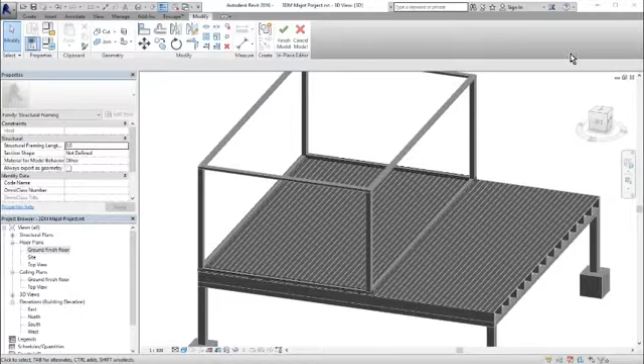Okay, now our roof is going to be sloping this way. And if we remember our reference drawing, it's going to be sloping like that. So from that, we know that our structure is going to be something similar to this setup.

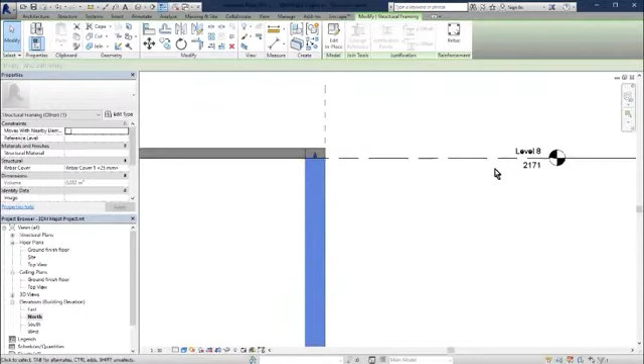So essentially, if we look at our north view here, we know that this side is going to be, one of these sides are going to be taller than the other. So we need to actually have another level here. So I'm going to call this level base of wall plate.

And we're going to have another level here, and let's call this level base of upper wall plate.

All right, this is our top view. We're not going to use that, so we're going to have that there. And just to be consistent, all our empty views, we want to have it there, and like that, so we don't get confused with the different views.

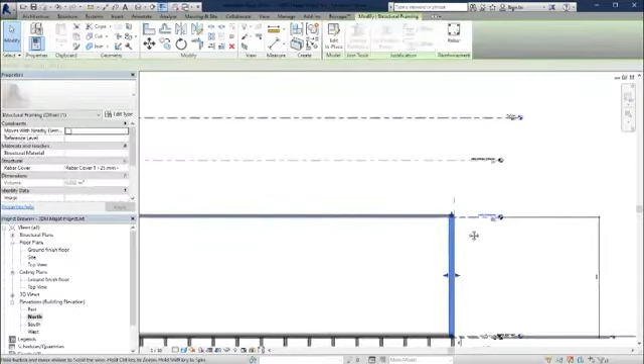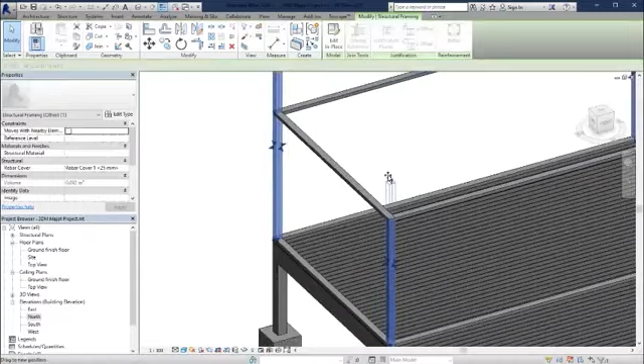So this side here actually needs to be this high, like that. And remember, we have two solids that's here, so we have to look at the 3D view, and we're going to make this one also taller, and we can use our align tool as a shortcut and choose that and say align to that, and we have that taller.

So we would probably, I'm going to leave this for now, but we would definitely need to have a member, a wall plate running on the top of this member here. So we are actually going to create a wall plate there.

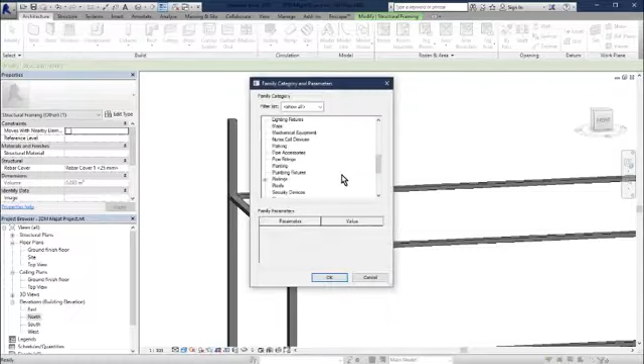I'm going to model in place, and it's a good time to save this project again. And we're going to choose structural framing. We're going to call this upper wall plate.

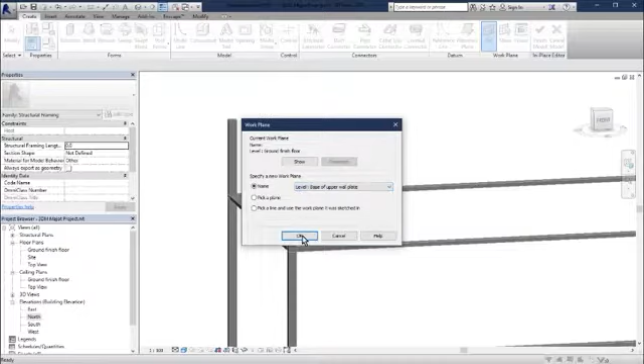And we are going to set our levels to the base of upper wall plate. There we go. And do an extrusion, so we'll have there we go. And this is going to be 50.

All right, great. So now we want to have rafters that goes here, and we definitely going to probably need a support in the middle, and a purlin, because this span is going to be pretty wide for timber. All right, and we definitely will have to double them up.

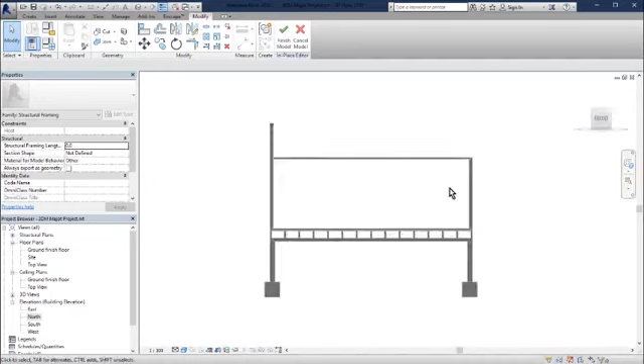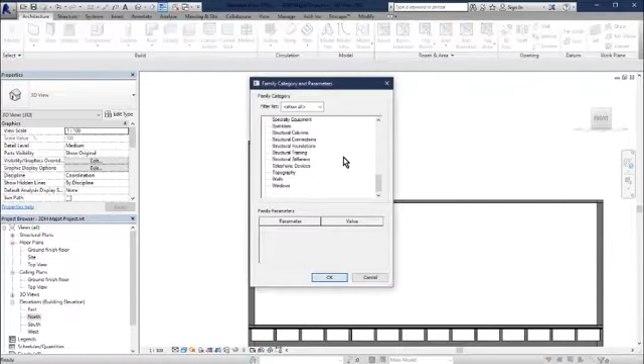All right, so if we look at our front view, so we should be looking to do some joists like this. Now to do our joists, what we can actually do this from the front view, and we can do that by choose OK, and we're going to create another model in place, and it's also going to be a structural framing, and we're going to call the roof joist.

And so we're going to have these members like that. So first thing we need to do is to set our work plane to front. So now our work plane is in front, so now we can actually draw an extrusion.

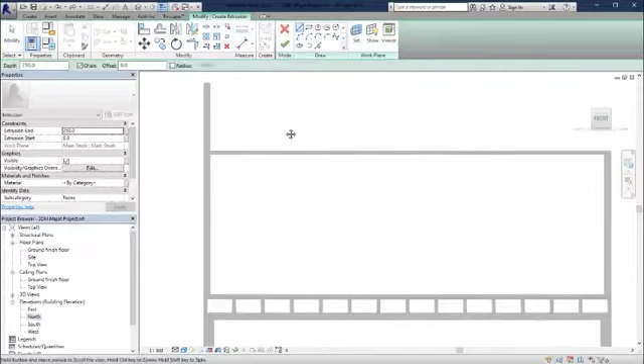We're going to draw, first to do this, what we're going to do is draw a reference line first. So let's use, so we're gonna...

And let's actually use between, we're going to do that again and use here and here.

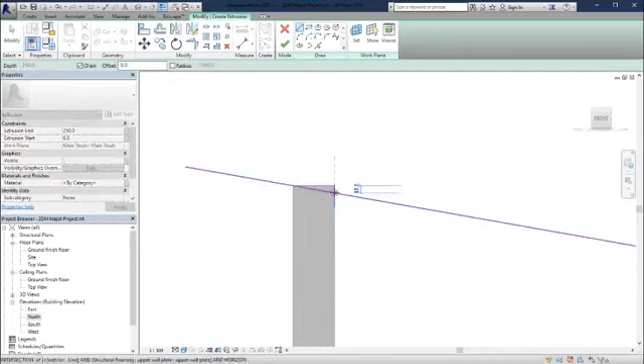And what we're actually going to do is extend this down a little and extend this up a little. And then we're going to cut around this, right? So this is actually going to cut out of this.

And we're going to use a break tool to break that point there and use our trim tool. Trim this there and trim that there. Trim that to there. So now this kind of does that, right?

And we're doing the same thing here. Actually, this needs to be angled a little bit more. So actually, let's fix that up.

Let's do that again. That would need to go from here to here. There we go. And this would be extended downwards like that. And this would be extended like that.

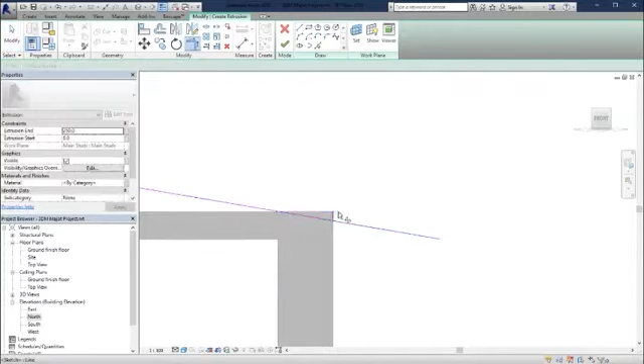So now if we trim this properly, so we do like that and trim there and trim that there, and coming down this way now. Do that and trim. Let's break this first. Let's break that line and trim to there, to there, and trim to there.

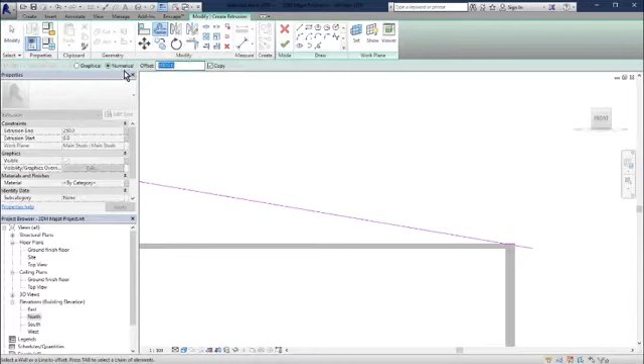There we go. And then the height of this would be 200, so we would offset this, and this is the offset tool. So we're gonna offset it 200 millimeters, which would be like that. And I'm gonna draw this like that and trim that to match there.

Now we're gonna do the same for here. And trim this to match there. So we can even extend this down a bit for our overhang. And choose. Okay.

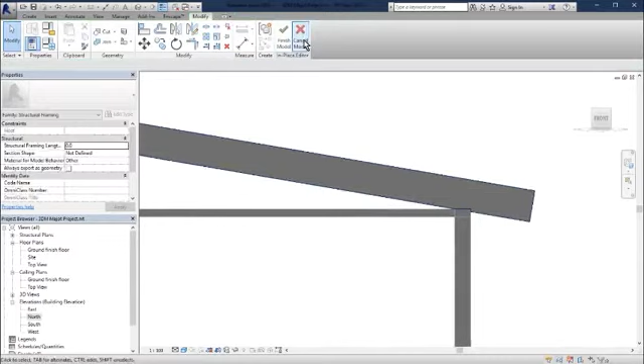Now in this design, we also need to have two members running here, and your structural design might vary. So what I'm going to do is go back to my wall plate here and copy.

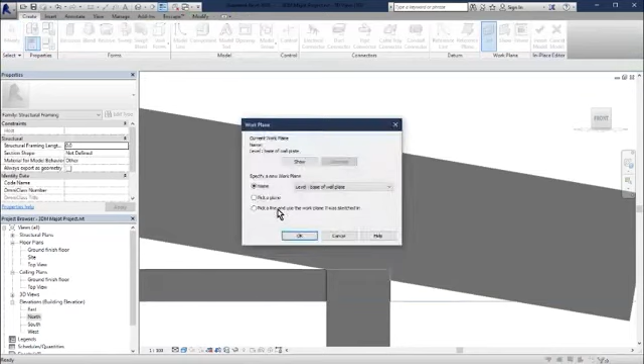First I'm going to change my work plane. Let's set our work plane to the surface here, and then rotate that 90 degrees. Let's switch to wireframe so we can see this.

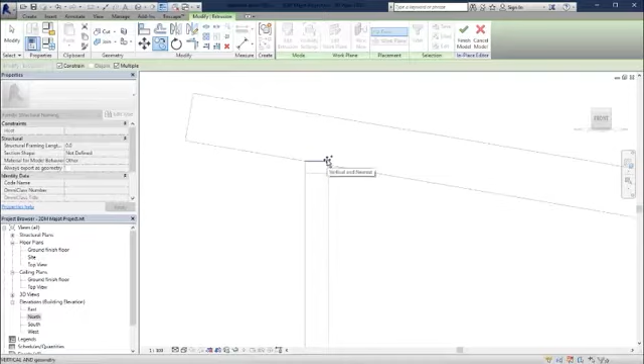I'm going to put that here, copy this again. Now we're going to copy that there, and copy this. Unconstrain that, and up here. There we go.

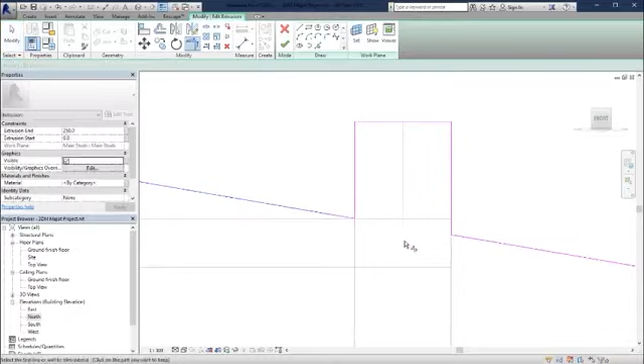Choose OK, and let's edit this now. We're going to want to edit this again, and we want to edit this path to now include that. So we're going to trim this up like that, and we're going to do the same here.

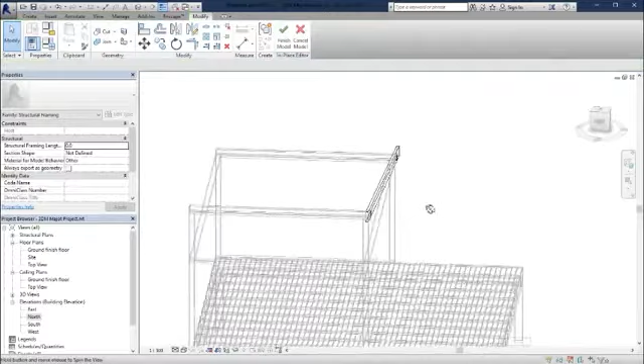I'm going to delete that. Choose OK. Alright, so if we look at that in 3D now, we get this. And we're going to make the thickness of this 50. So that's kind of what we get now. Let's shade it more.

And so we're going to extrude this a little more. Let's work with a 2 foot overhang. We can do it from a top view. Let's go from the top view here, and we can actually go out by 2 feet.

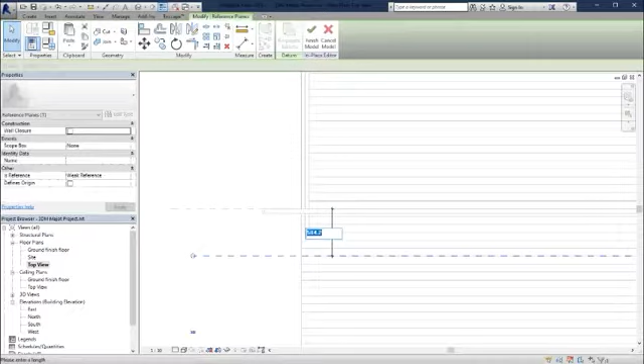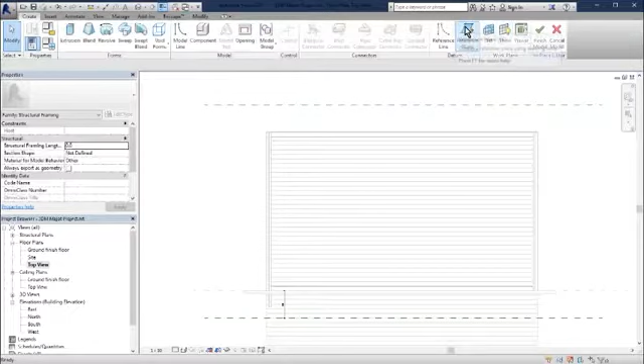So we can use a reference plane right there, and we can make this reference plane be 2 feet. And we're also going to back as well, so we want to make this 600. And while we're doing that, let's also make...

So these are all reference planes that we're doing here now, and let's make that 600. Alright, so that's basically our overhang. So we know that we want to align the edge of this to there, edge of this to—let's choose that one—align the edge to there.

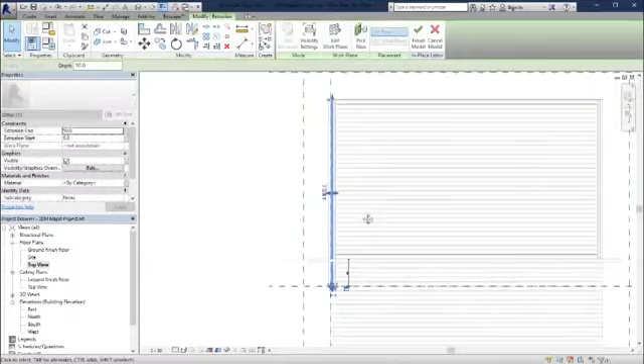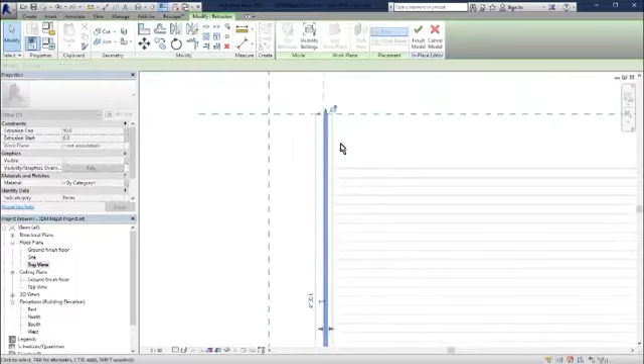We also need to grab that bottom one as well. Actually, no, we just need the top. Let's look at that in 3D. So there we go, it's not looking bad.

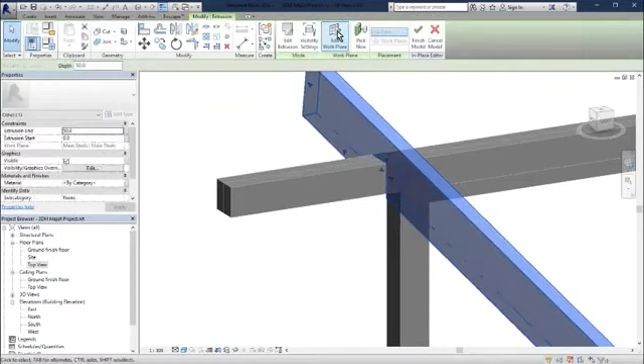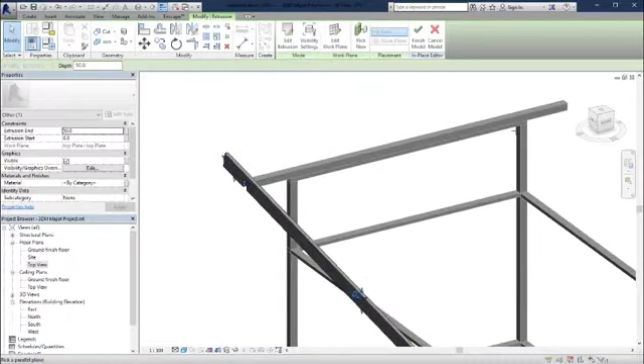Alright, and what we want to do is start this at the face here. So let's go into this and let's actually change the work plane to here.

Extrusion to negative 50. There you go. And now what we want to do is array this.

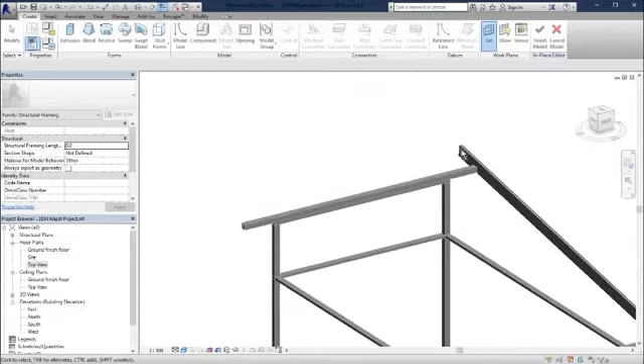And how we want to array it, let us set our work plane now to be the top view. So that's our work plane. And we want to use the array tool, and hopefully, choose the last one.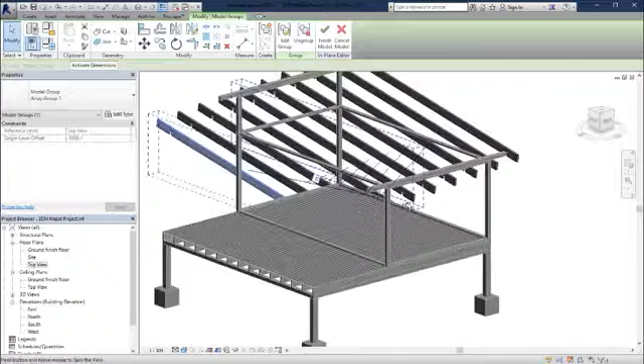So we want to choose the edge of somewhere and choose the last one somewhere, and say we want maybe 10 copies. Oops, seems to have made an error there, so you see that. So we want to change that.

Let's use our top view, it's probably a better view to use. Okay, that's our piece there. So let's go to array and let's choose that menu there. Let's set our top view. There we go.

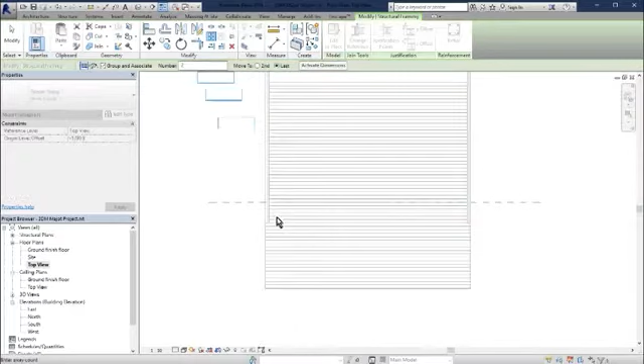And what we need to do is finish modeling first, and then we use the array tool to go from there to the last one here. And let's try 10 copies. Let's do that again.

So what we're going to do to copy this is we're going to choose OK to come out of edit in place mode. We're going to go to a top view and create a group, turning this into a group. So if we edit one, I will edit. We're going to call this rafter, and we're going to copy this.

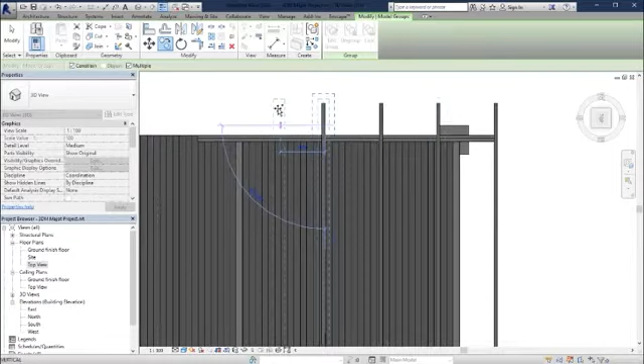And let's try 900. So here we go. I have multiple selected, so it's going to always copy at 900. And let's just make the last one up to this end here. So I'm going to use my align tool and align the edge here to that edge. Great.

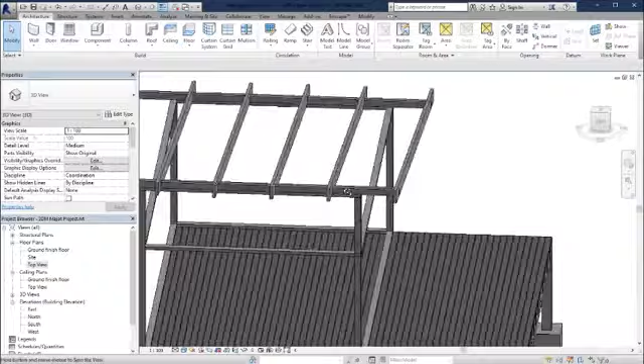Alright, so now we have our rafters. Now, for our purposes, we are going to need a purlin in the center to help with structure, because these spans are quite great. So we'll go here where our studs are, and we are going to copy this to the center.

So let's go to our top view, and let us create a reference plane, and let that reference plane be the center. So now we can... let's go to our 3D view.

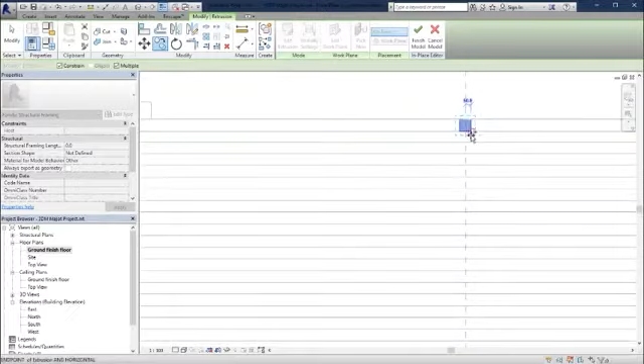So we can grab these, and that's where it was. Let's go to our front view actually and copy that. So we're going to copy that here, and we're going to also copy it here as well. So if we look in our 3D view, we should have something like that.

And what we're going to do is we need to have these reinforcements here and here as well. So we're going to choose OK, and we're going to copy these guys here.

So let's go to top view and copy. We're going to select here, copy one in the middle and copy one on this side. So we should end up with something like that.

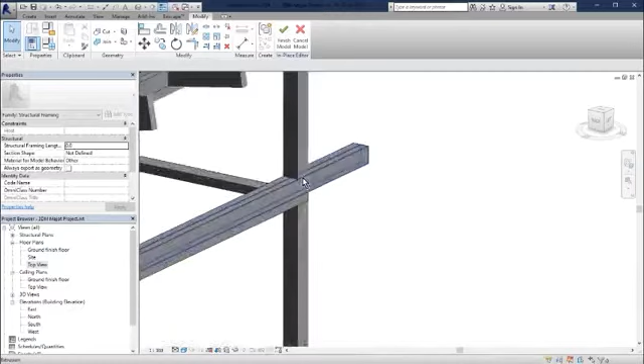What is actually happening here is that this will land inside that, and this will land inside. We're going to land this on the inside here, and on the inside bigger.

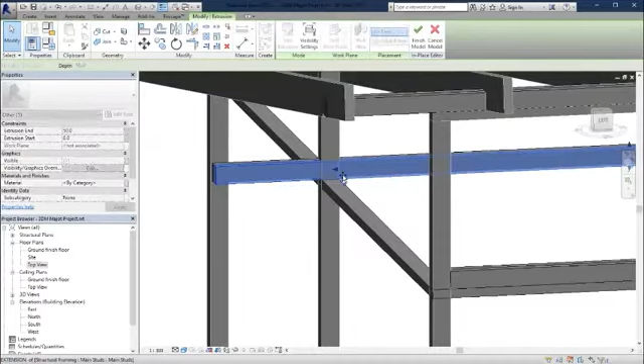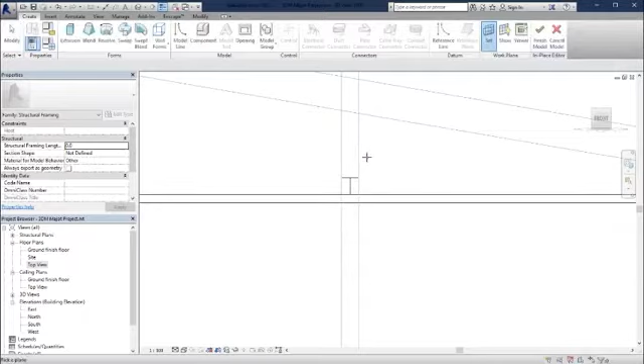So we have some purlins, so we can have some support for our structure. Let's go from a front view, and let's go to wireframe, and let us change our work plane to the front, so we can move these guys here now, from here to here.

Now we want to actually cut these out, but it's a good thing we made it a group, so we can go into this and modify the path of the extrusion for this. That, that, that. And it will, of course, change all of them to have that made there.

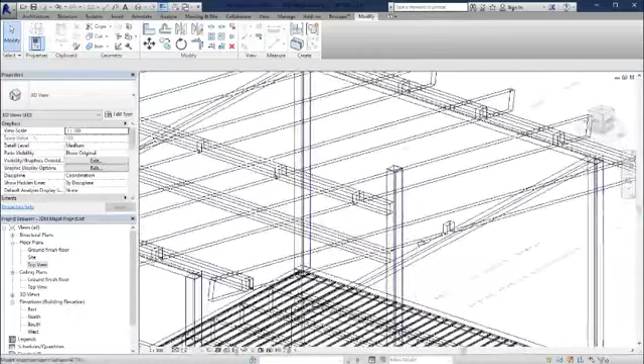So of course we now need to modify these studs, and these studs need to be down to here, and this one also needs to be down to here, which is okay.

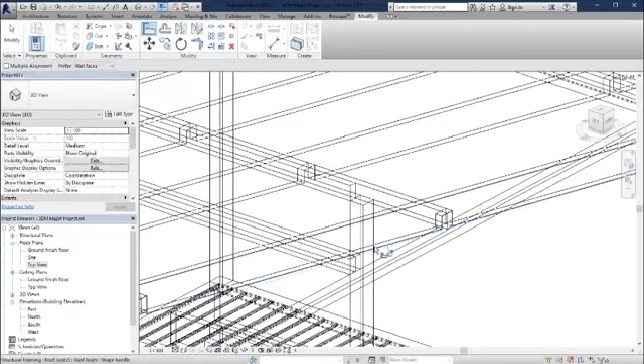And we're going to use align, so that we align these studs to there, and align these studs to there, and these studs to there, these studs to there. All right, and that will give us that support in the center.

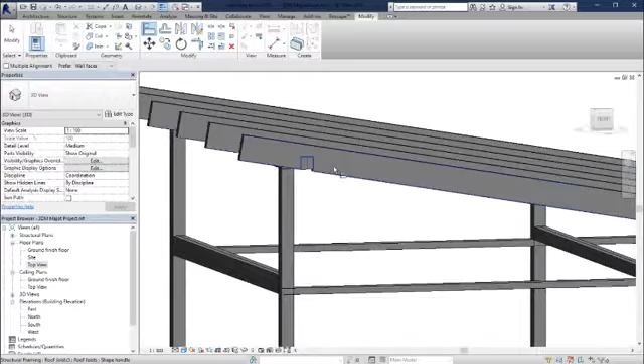Structurally, though, I think this can work. Sometimes there need to be supports at the corners, so you guys can choose if you want to put that on. Maybe this is a little too small in terms of maintaining the thickness, so maybe this should have had to go up a little bit more.

But pretty much at this point now, we can put in our secondary studs in the center and then mark out our doorway.

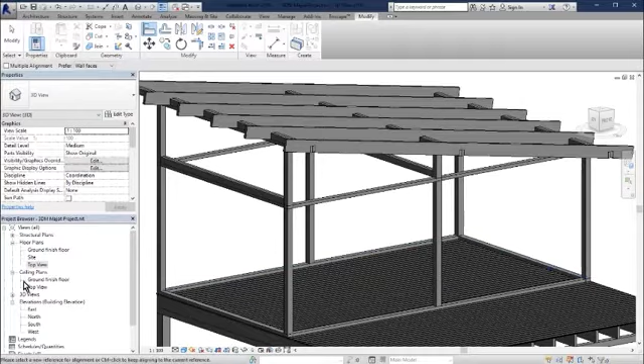So let's first now determine our openings. And to do our openings, we are going to use our front view, and we're also going to use more levels.

So I'm going to copy this one up, and we're going to call this top of door. And we're going to have a couple more levels: bottom of window, and another one we're going to call top of the window.

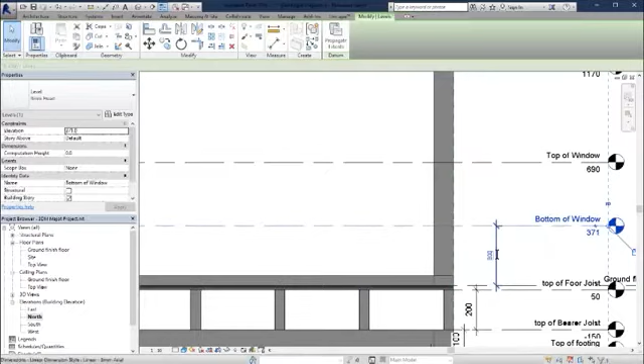So from the finished floor to the bottom of the window, you want to make about 300. Actually, if we look at the design, this was a bit taller. So this is probably going to be 3 feet, so maybe 4 feet, which is 1,200.

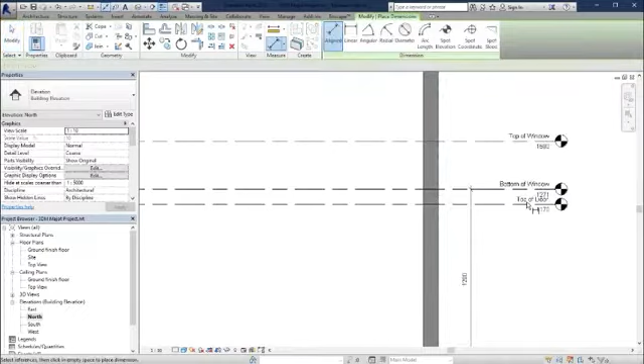So this would be our windows here. Let's make the window a little bit more sleek, so let's make it 600. There we go.

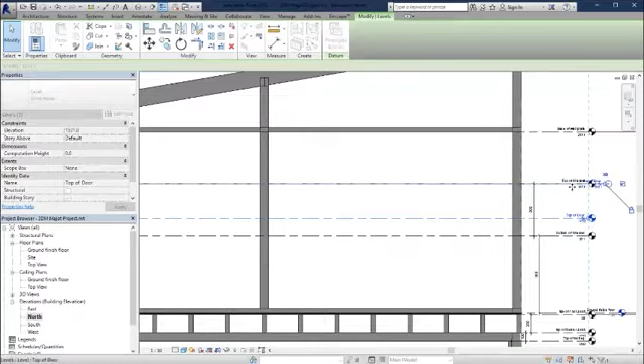Now our door will be the same height as our window actually. All right, so we could actually do away with this and call this top of window and door.

And we're going to use some reference planes now to determine where our door will be. So let's place our door here. We're going to want a 6 foot width.

Let's make that plus 200. Yeah, probably about that wide.

And then our window will start here and it will continue all the way to there. So that will be our window there.

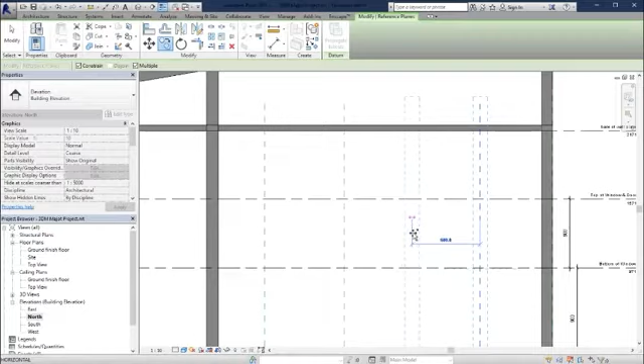This will be our door, which will be a double kind of door. So let's actually put in the middle part of our door, the 600 mark. There. All right, so door, window.

So the next thing we're going to do is frame out our door. And to do that, we're going to create a new edit-in-place mask. So we're going to go to component, go to model in place, and it's time to save again. And this time we're going to also go with structural framing.

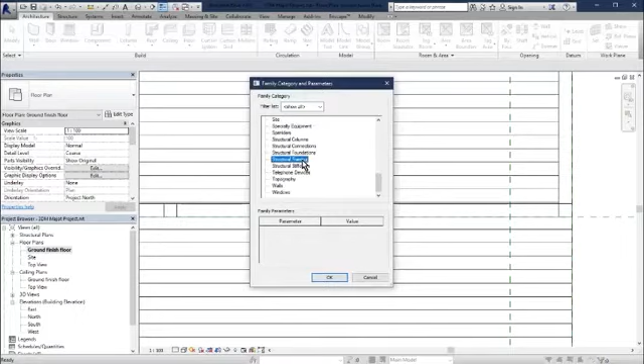All right, and we're going to call this openings. We're going to call this middle studs.

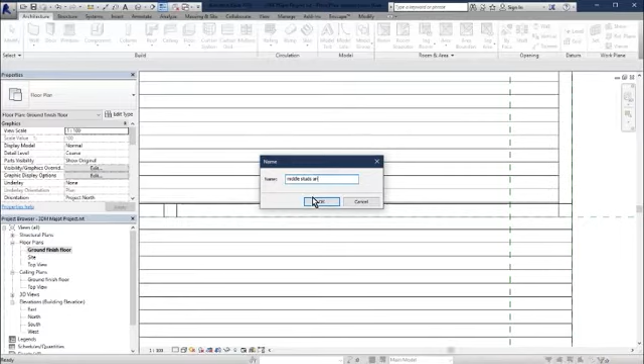And openings. We are going to create that, and that's going to be 100 by 50 millimeters. Okay, that's right. So we're going to have that there.

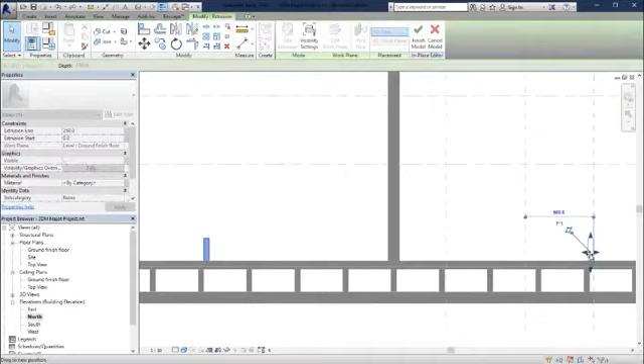And we're going to use our north view. Let us move that into place, up to that level there. Actually, it's up to this level here. So use move tool, then we'll use copy tool and copy that here.

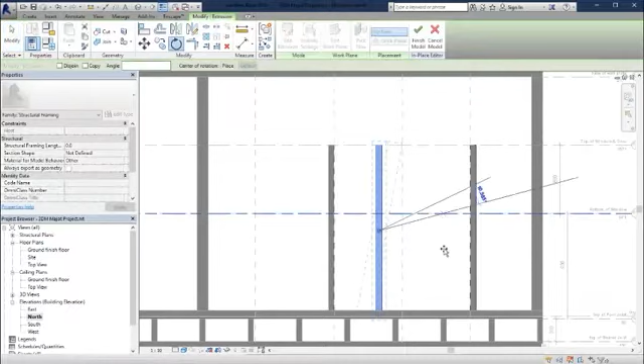We're going to copy that and rotate it 90 degrees. I have that up here. Let's make sure that this actually touches. So that.

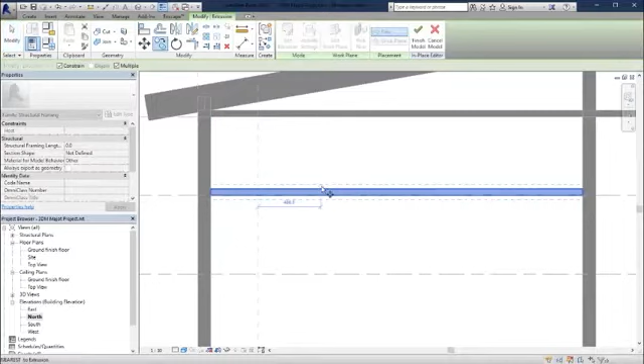Next, we're going to do the same for our windows. So we are going to copy this down here. Actually, our window has to start - we're going to run it from one end of this to the other end because the main stud is going to be in the way. And we're going to copy from here to here. There we go. So this will be our window and this will be our door.

So now we need to do the rest of our framing. What would happen in reality is that these studs will go all the way up to this stud and this will go here. This stud will go all the way up and this will go there. And then you would have these at a particular distance. So we're going to go over like that. I'm going to choose OK on that.

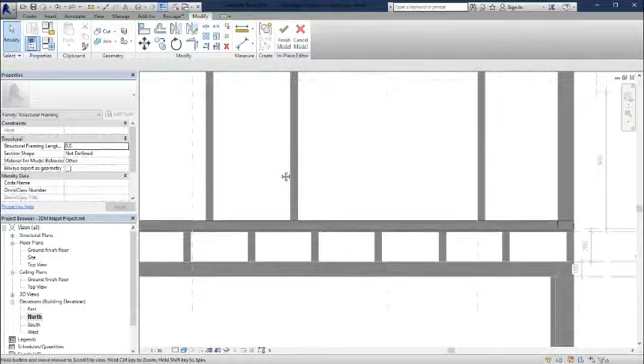We need to cut this stud here because the doorway is here. So this would actually - let's use 3D view so we see what we're doing. We can see that this is actually on this side. So it actually should be the other way around. So let us fix that now.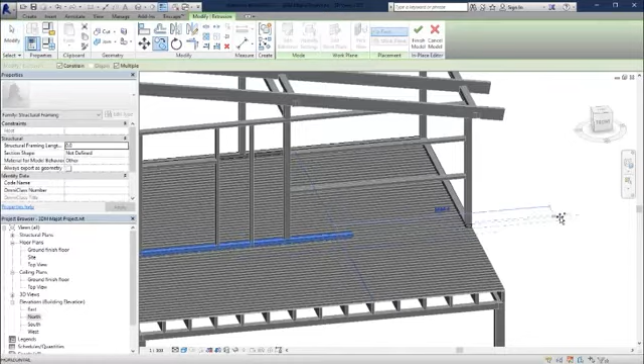Copy that, and we're going to align that there. And for the meantime, align that there. We choose OK, and then we're going to go into this mode here and move all of this.

Let's use our south view. Let's make this a little smaller. Let's change the scale a little bit smaller. There we go. And now let's move this into the correct location.

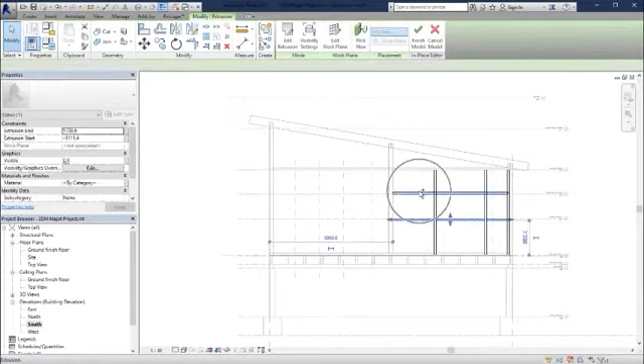So we're going to move this over to there. And this is supposed to actually be on that side. Let's take a shaded view. I'm going to adjust these, and let's use the alignment this time. There. And there.

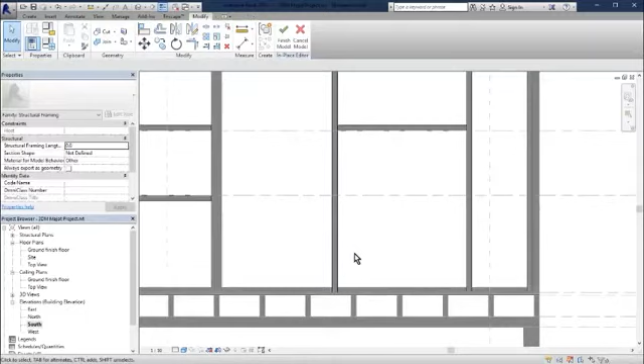And now what we want to do is to copy this further. But this should be sitting on top of the stud in this case.

At this point, choose OK, and we want these studs here to come in like that. There we go.

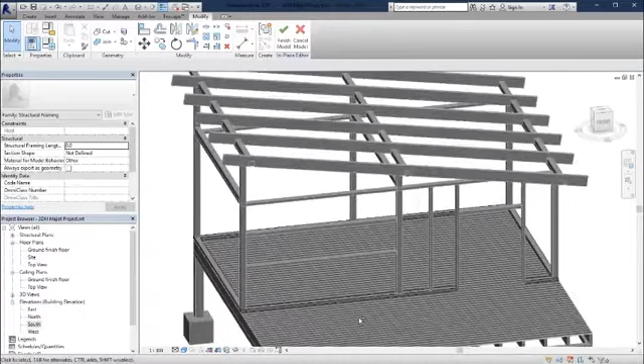All right, so we may need a couple of members also going across the front. So let's go back to the south view. We're going to copy a few of these members. I'm going to try and space them evenly. So to do that, we use our dimension tool and we can choose these like that and say make these equal.

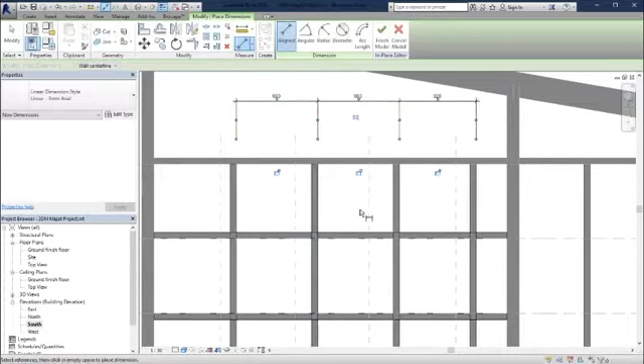Actually, let's do that again. Choose these like that, and then let's make these equal. There we go. And then of course we need to align - this time we're going to align multiple. So we do AL, align, and align multiple.

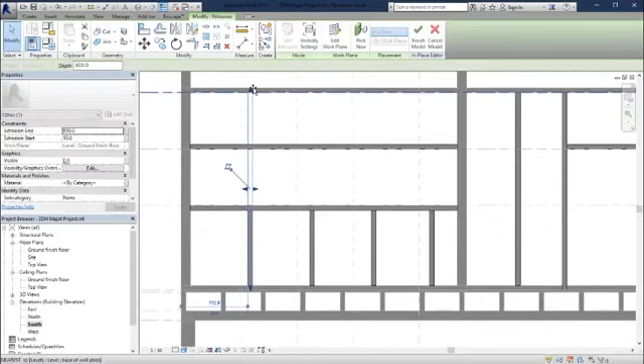So you need to align these guys here to there. And then we need to copy these guys here now. We can just copy them in the same location and just change the height and multiple, and actually just change these heights here.

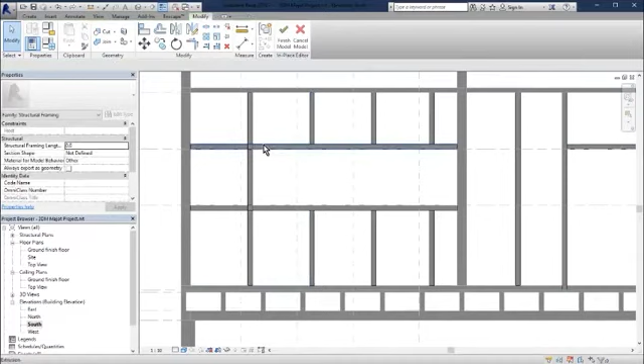And that one. All right. So if we look at that in 3D, we realize that we have aligned these guys here. And what I'm going to do is put one of these windows back here on each side.

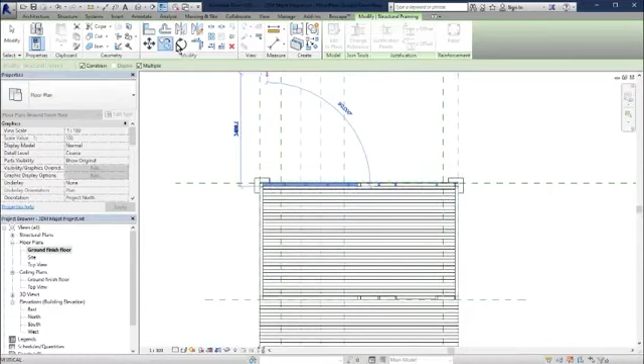I'm going to choose okay to that. And then from maybe a floor plan view, I'm going to copy this from here all the way back to here. From my 3D view, I've copied it and I want to now delete those.

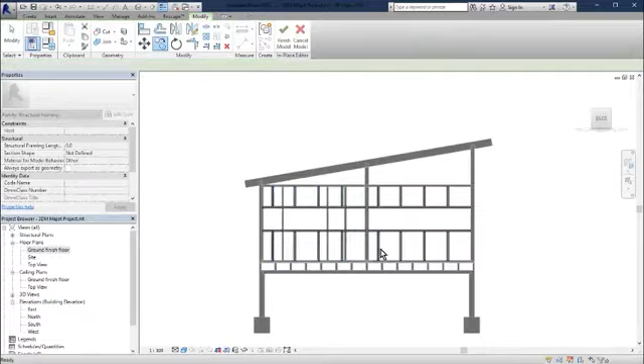And from this back view here, what I want to do is copy these over right there. So now we have that kind of thing.

All right, so for the sides now, well, we could copy one of these there and rotate and place it here. And we could copy a few of these guys - I'm just randomly copying it now.

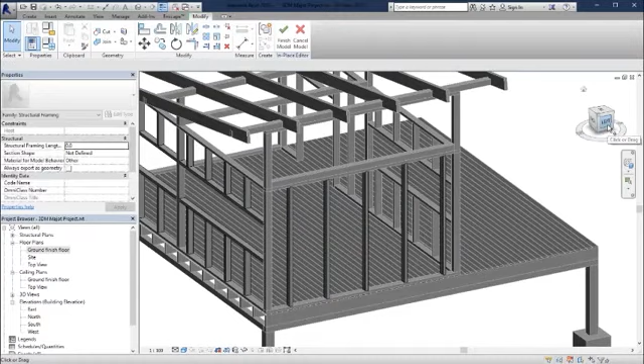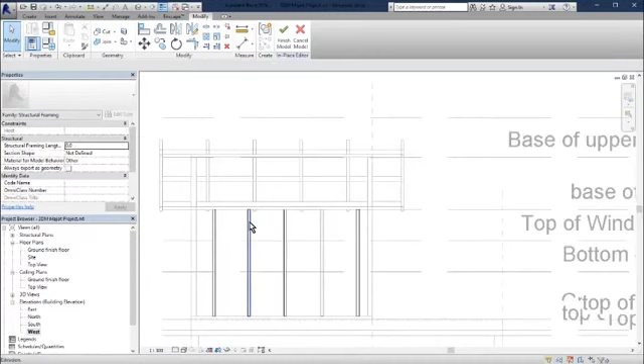And take a left view, which works out to be - I believe it's east. No, let's see which one it is. Maybe it's west. Yeah. And what we want to do from this view is use that same dimensional mode to make it equal. Yep, we can do this. And we can pretty much leave that as it is there.

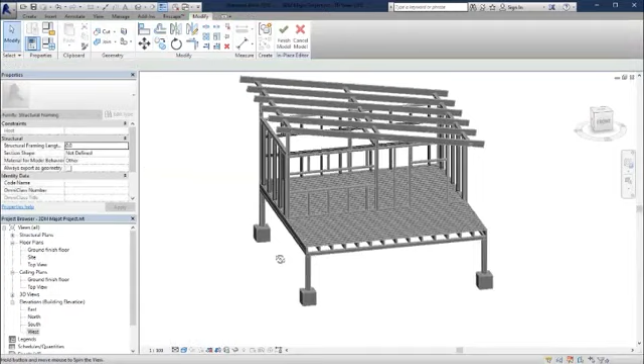So if we look at that in 3D, we now have that. And we are then going to copy it from here to here, like that. So we now have the framing of our wall.